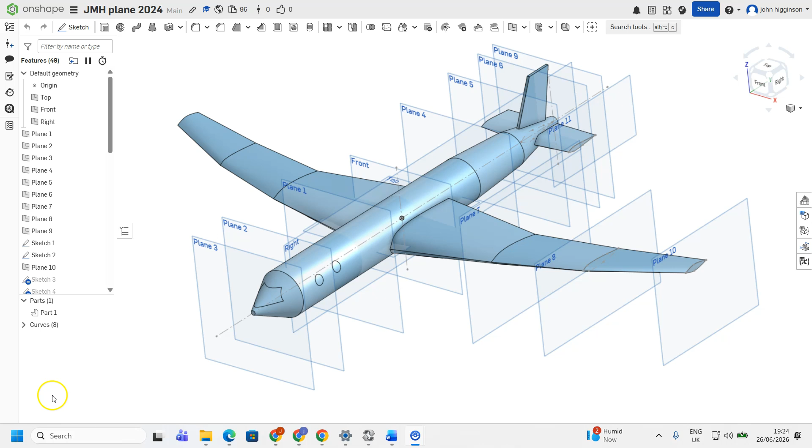Hi there. So this is an activity I use with my engineering students to introduce a range of techniques. I suppose it's the basics of surface modeling, how to use multiple planes in order to create an interesting and complex shape.

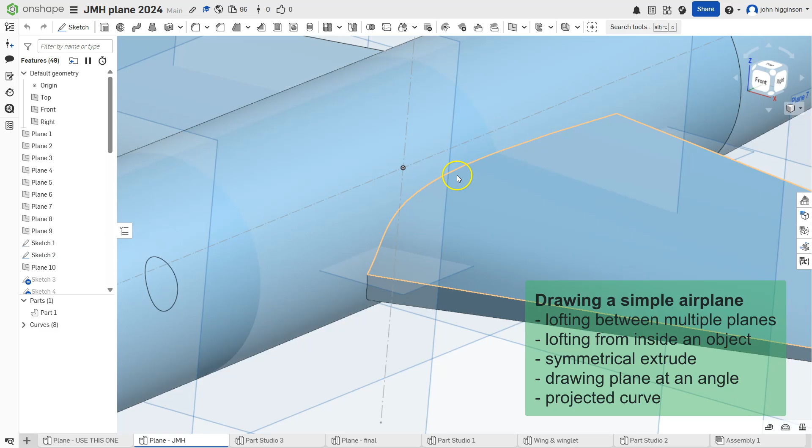Projecting from the center in order to avoid the issue of interaction with the shape and a curved surface. And then also something I've only found out recently, which is projected curve, which I was very pleased with. It means you can draw a simple shape on a plane and then project it onto a curved surface, and you can start getting some complexity.

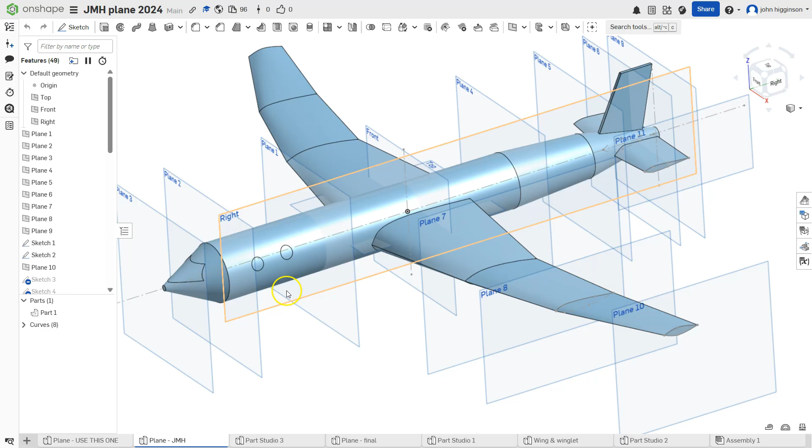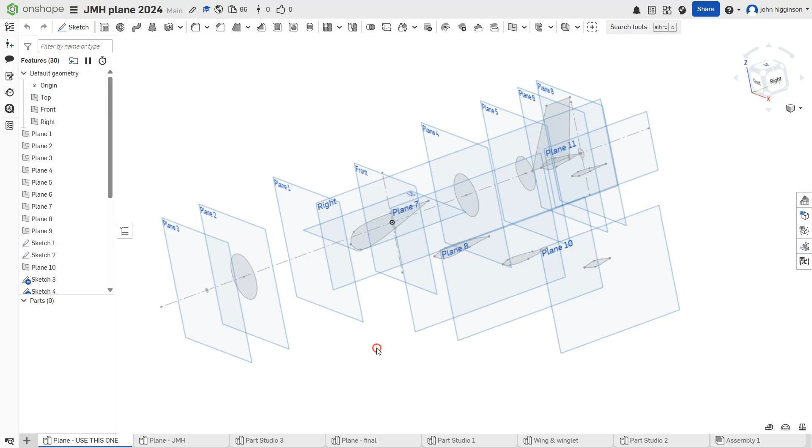So this is relatively straightforward, really, but my students quite enjoyed doing this. I'll put the link to the basic structure of this in Onshape, and I'll get round to producing a guidance sheet as well, because it's very pleasing to start off with what we have here. This is what I give to my students, like the bare bones or skeleton of what this simple plane model is made of, and then building it up. You can build it up in a relatively short space of time.

Now, how you actually construct all of this is relatively straightforward. It looks quite complicated - multiple planes and then simple shapes, just circles for the most part. For the fuselage, we've got a kind of lopsided trapezium over here for the fin. And if we look at these shapes here, let's zoom in on this one.

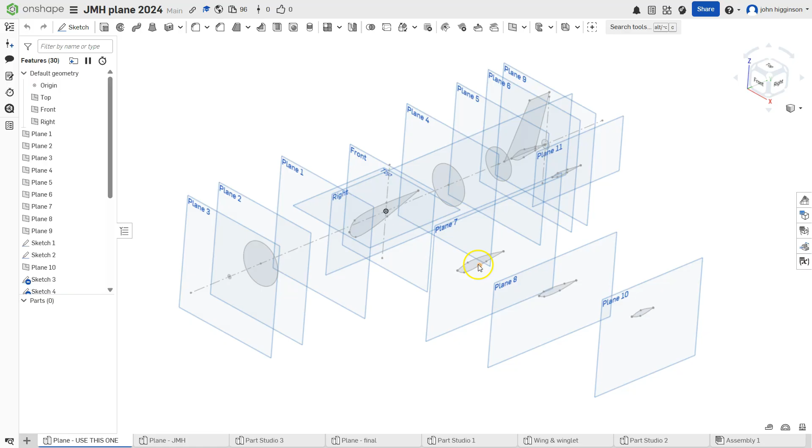Which one is this? This is sketch 9. So just zoom in on that. It's just a spline drawn and then mirrored, sketch mirror to make a closed contour, and then lofting them together.

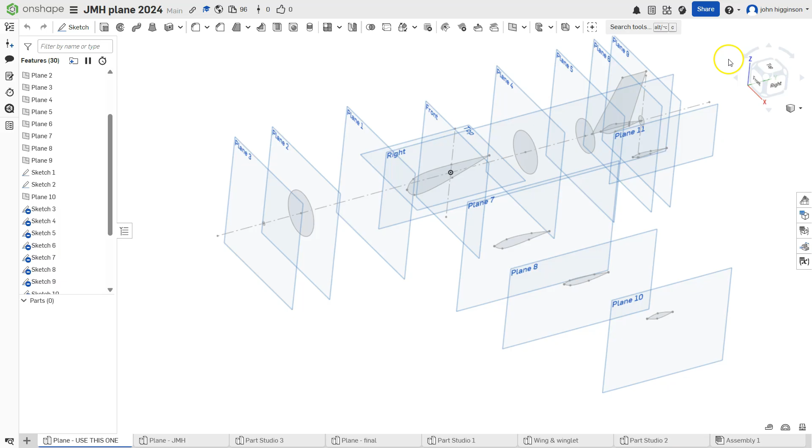So setting this up is relatively straightforward, and I won't do that in this video. What I gave to my students was all of this ready to go, and I think they can make a lot more progress. So it's a good introductory activity.

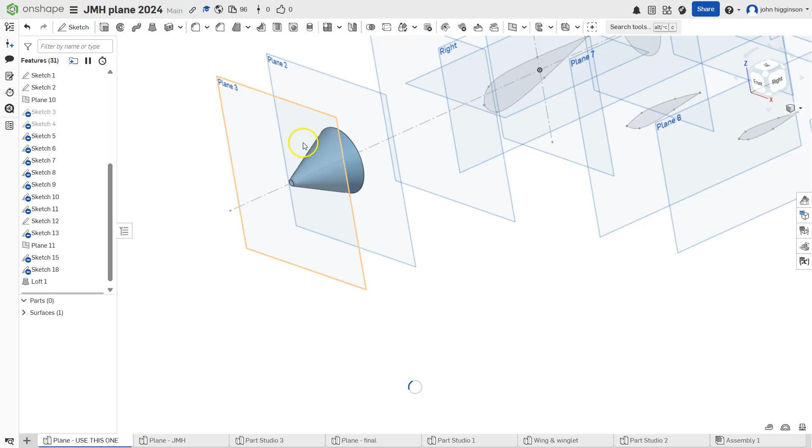So we can zoom in, and we're going to go to loft - between this shape here, so not the point, this shape and this shape. I would do that as an individual loft there. Thinking about lofting multiple shapes - did we do a solid or a surface? I think we'll do surface for now.

And then we're going to loft this shape to this shape. Oh no, that's not going to work. I think we're going to have to do solid. Let's go back and do that. Let's go back to loft. We'll make that solid. There we go.

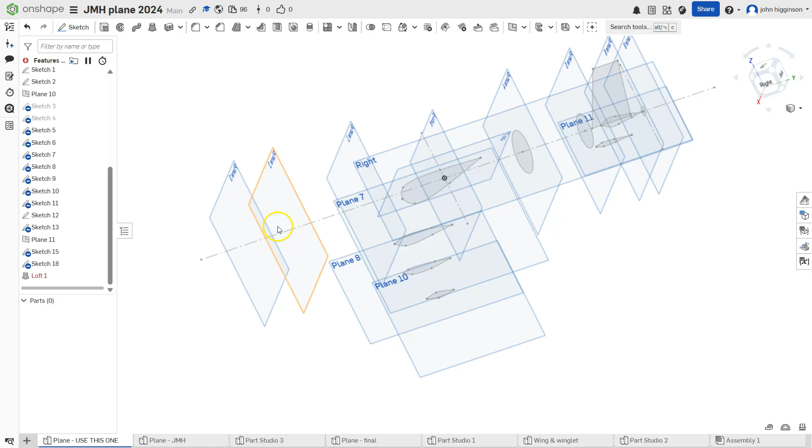Obviously, the fuselage won't be solid. Oh, there we go, marvelous. We'll do that again, so go back to loft - this shape to this shape, and that's solid.

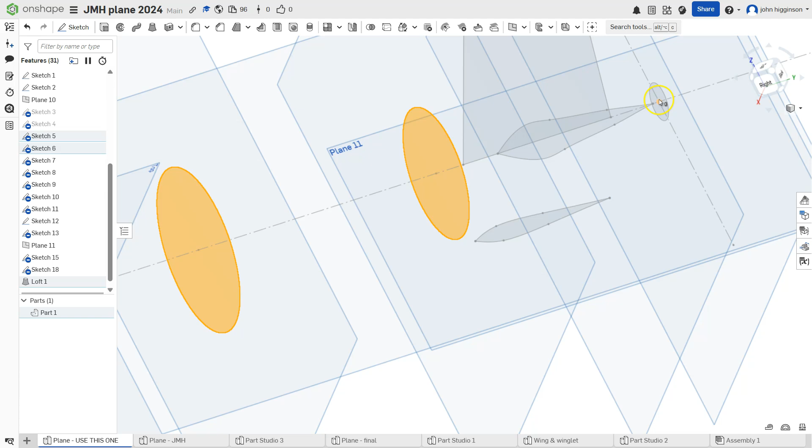There we go, good. So what you could do, when you're lofting, is loft multiple shapes together, and we'll see what this looks like. We go right to the end here and loft all of that, hopefully. There we go, that doesn't look too bad - it's a little bit bulgy.

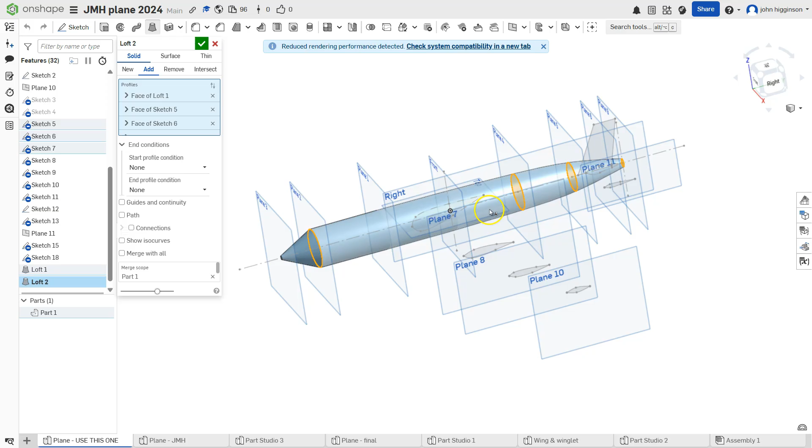If we have multiple shapes lofted together, the software tries to keep the curve as smooth as possible. Now, if we included the nose cone here, this all kind of bulges out and looks a little bit odd. I think it's quite useful to do individual lofts in this case, and it straightens it out. Most fuselages of planes are actually quite boring - they're quite straight.

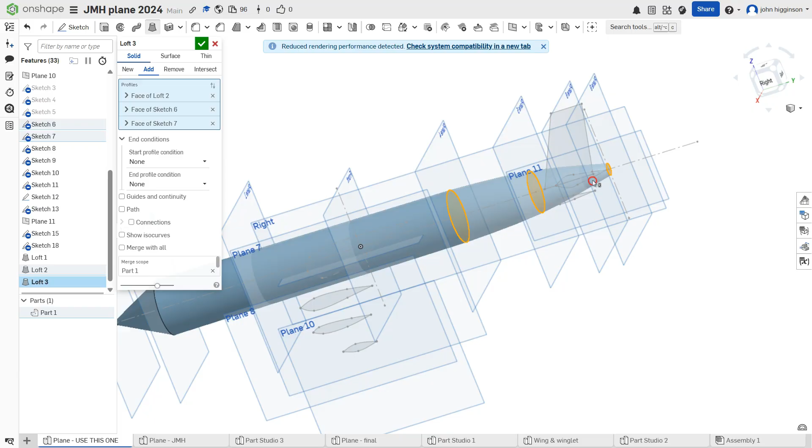So we can do a loft from here to here, and we could probably do all three of those together, and that looks about right. Good, so we've got the fuselage, the main body of the plane. That's all good. Okay, so how do we do the wings?

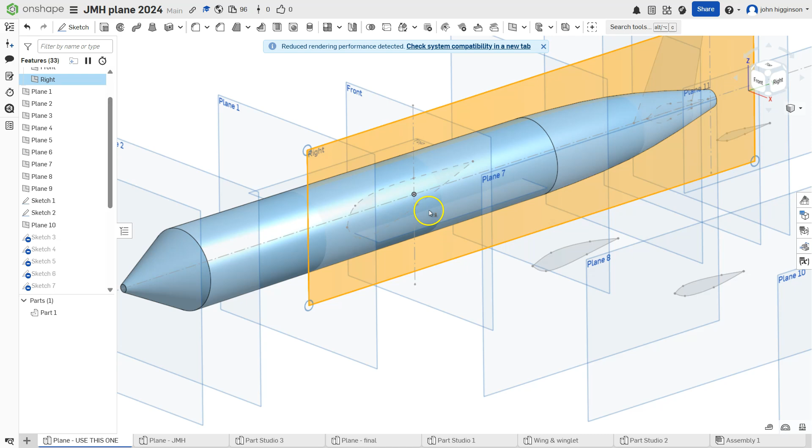The wings - if you're trying to draw a shape onto a curved surface, there are ways to do that, but actually an easier way is to just draw the shape inside, in this case on the right plane. So we're just going to draw - well, I've done this previously, I drew a spline and then mirrored it and then rotated it slightly using transform, so it's a bit more interesting.

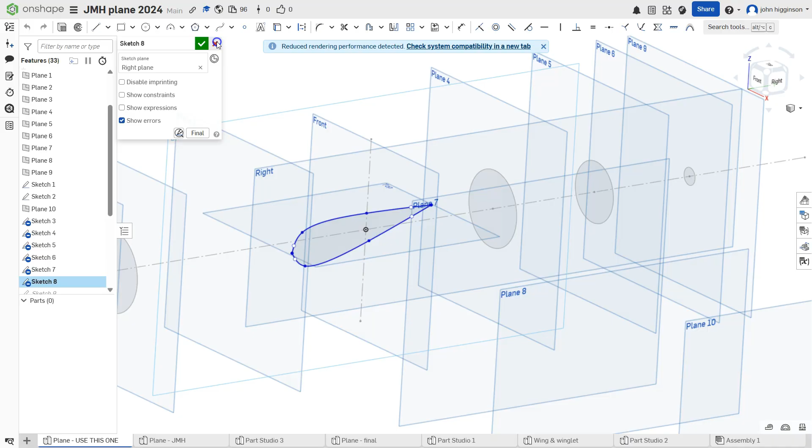But if that shape's inside and we loft from there, we have to locate where it is. So that is sketch 8 by the look of it. If I loft from sketch 8, it's quite useful rather than trying to select the shapes with the cursor - it's really useful to use the menu over here. If you just identify which sketch it is, sketch 8, we can select it, and we don't need to worry about trying to pick it all with the cursor.

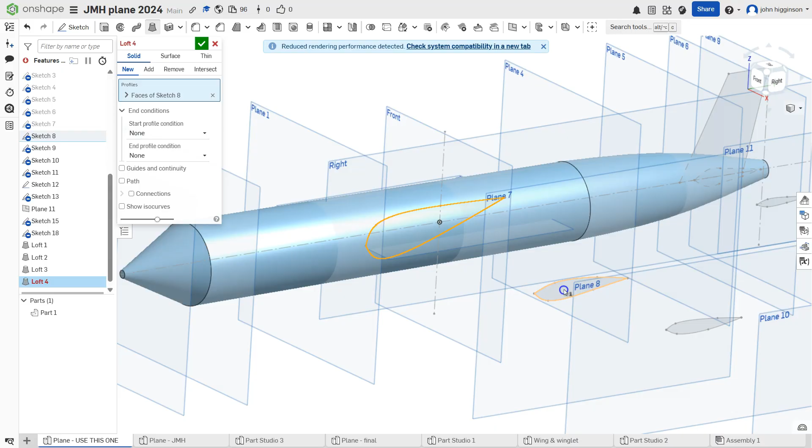And then we can see these clearly, so we can select this one to this one to this one. But, oops, it may be that you want that shape there. I think that looks a bit like a banana - I don't think airplane wings are quite like that. So I think it's useful here to do separate lofts.

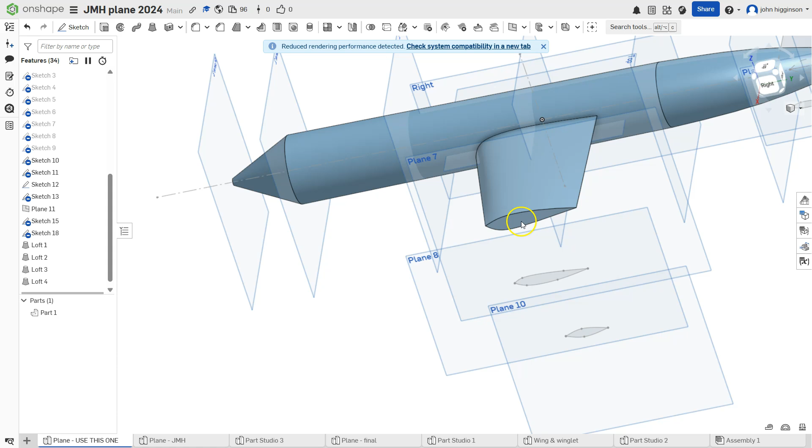So here to here, and loft that. You get these more dramatic, rapid changes rather than curves. I think that looks a bit more realistic for a wing, and we could continue if we wanted to. So we can accept that sketch.

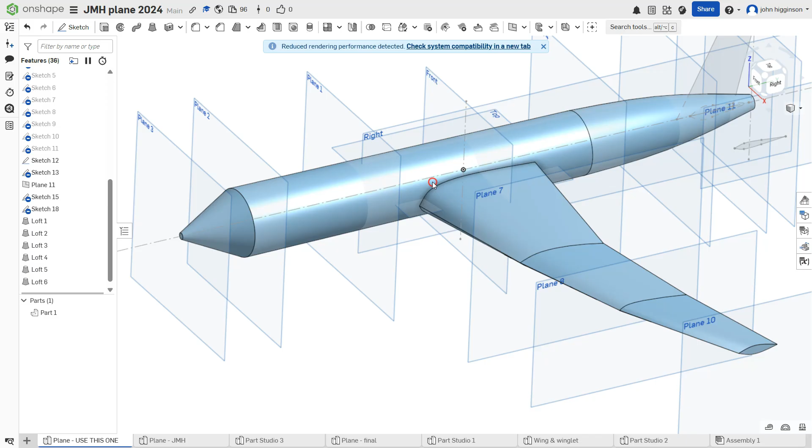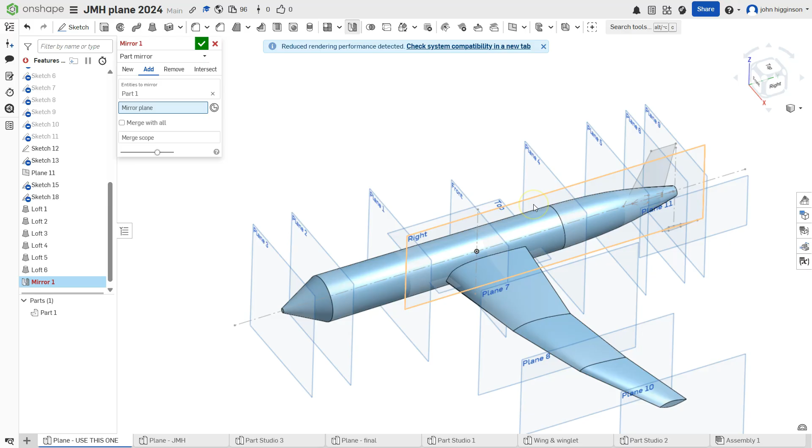As always, if we have a symmetrical situation, rather than redraw the whole thing, we can just go to part mirror. Rather than add, I'll go to new, then the entities, we can just select that entire thing. The mirror plane is going to be the central, in this case the right drawing plane, and that mirrors it, and that looks rather pleasing there. So we can accept that, that's good.

So over here I've drawn this slightly lopsided trapezium, just using lines on the appropriate plane. That's quite straightforward to do. So we can select that, and we're going to do an extrude. You could do thicken, but if we're doing extrude, we go symmetric, so about the midpoint.

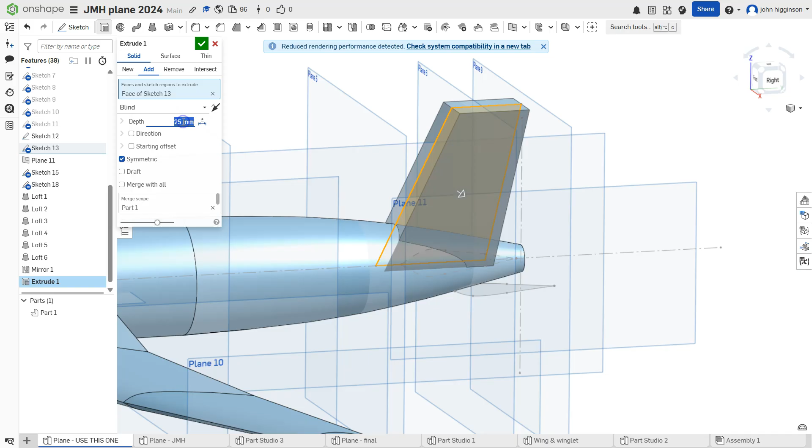I don't know what I did here, maybe 5 mils was it? Looks like a little bit skinny, maybe 15. Yeah, maybe 5 was right. Yeah, 5 looks about right.

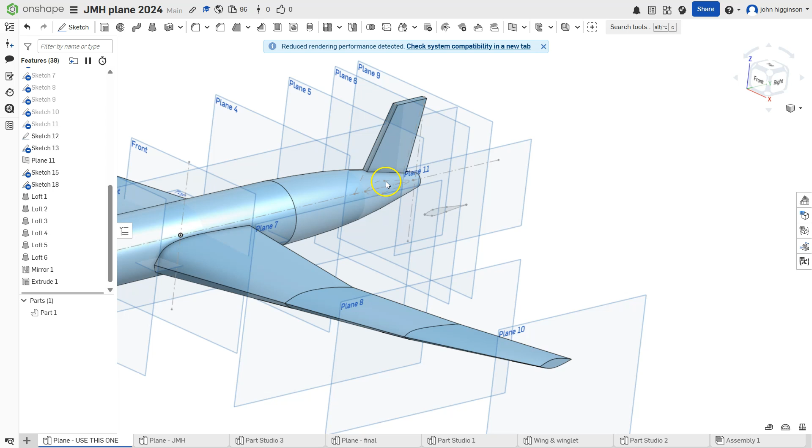Good. And again, we could go to add. New would create a separate part, so add looks quite good. So we get our tail fin there, which is quite nice. And then these kind of side sections here.

Again, I've drawn, if we find this one here, this is sketch 15. Let's click on N to look at that. So what I did was I drew a spline, and I just mirrored that about this central point.

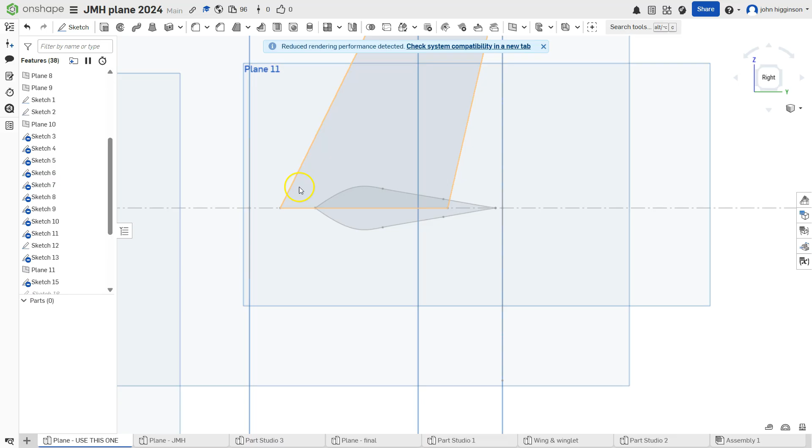There we go. So again, we're going to do a loft. Rather than try and select that, if we just figure out where it was, what was it? There we go, sketch 15. We're going to do add, I think. Let's go to sketch 15 again.

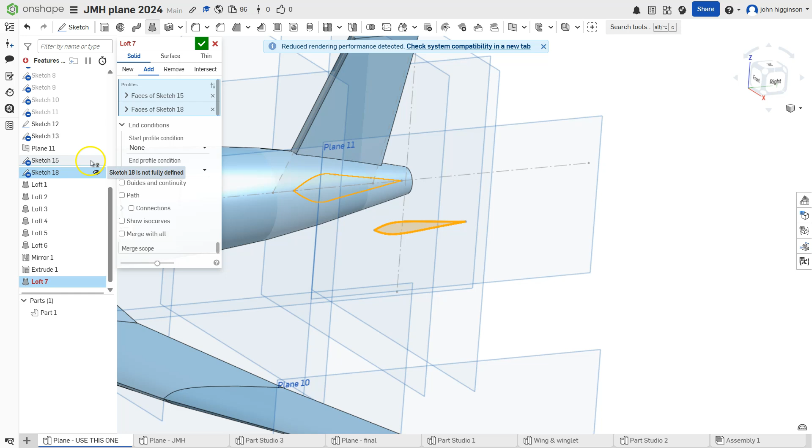Loft. Why does it not like that? To sketch 18? Oh, there we go, there we go. Yeah, it was a bit slow then, I was getting worried.

Okay, good. Once again, because we have the shape on the inside of the fuselage, the body of the plane, then we don't have to worry about all this complex curvature here. It will just sort all of that out for us. So this is quite a nice way to do things.

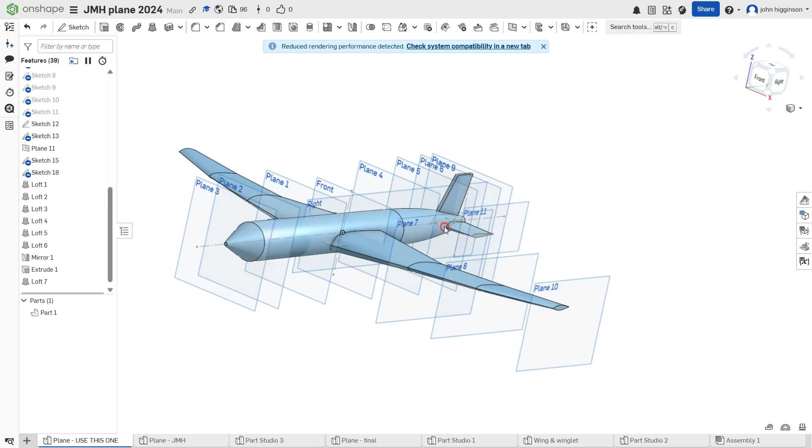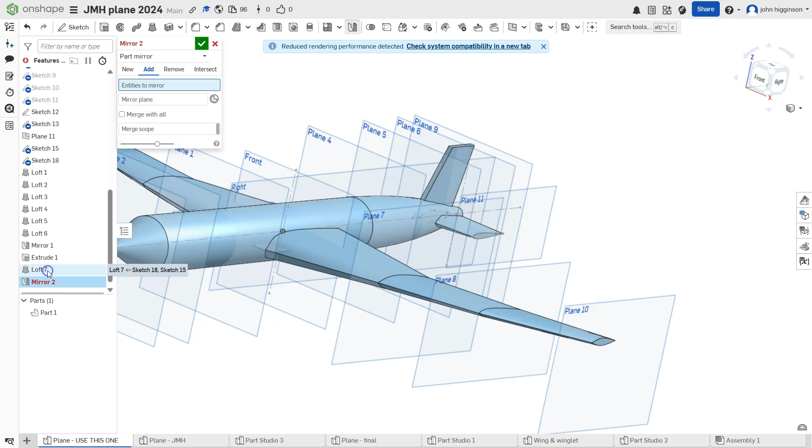Okay, so again, we could do the part mirror, go up to the top here. Part mirror is going to be add again, so the entity should be, oh dear, maybe, right, in this case, actually, yeah, we do want, that's interesting. Sure, we can do loft. Oh no, it doesn't like this. Yeah, interesting. Okay, yeah, I just hadn't noticed that issue from previously.

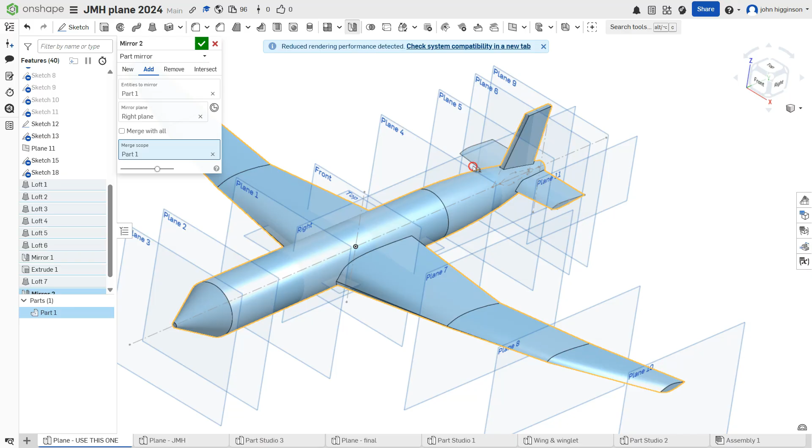So part mirror, because we added this section to the whole thing, when we go to add this, the entities to mirror, I can't select this part on its own. It's the entire plane, which is not ideal, but it does actually work. And we should get that sectional there, and it has added it. So we should have one part. Always useful to check how many parts you've got, and also the colors will change as well.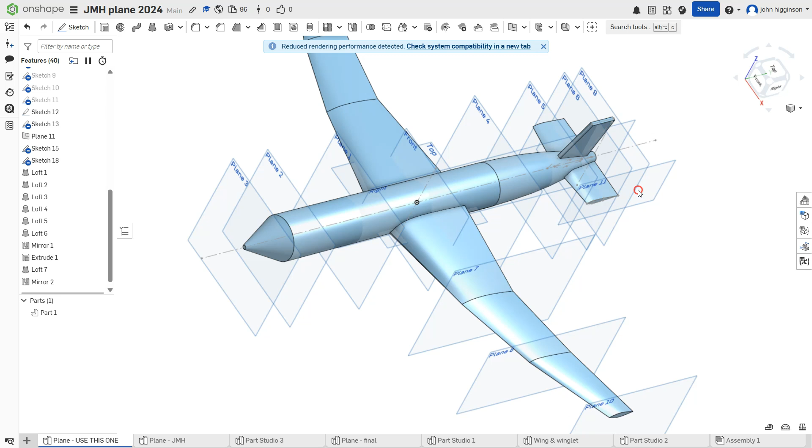So what we've got, fairly, I mean, clearly this plane will not fly. I don't think this is aerodynamically viable, but it looks like a plane. And from the point of view of the students who've never drawn anything this complex, they really enjoy this. It's a lovely little activity.

So what we could do is add a winglet. We'll see, we're on 9 minutes. I think we can keep going. So this involves various things.

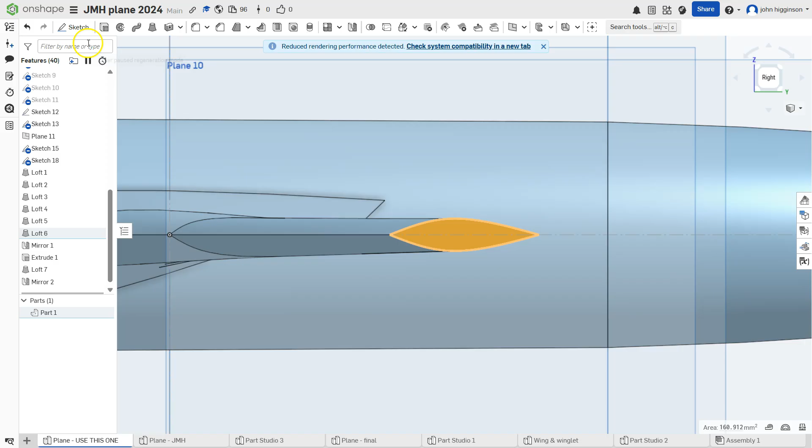I can go over here, click on the end of the wingtip, and I'm going to sketch on here. I'm going to draw a line. I'm going to make that a construction line from here to here. So we have a line there.

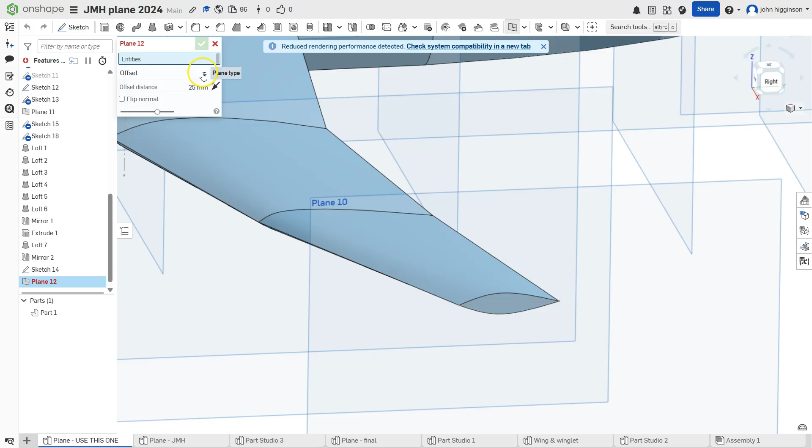I can accept that. And now we're going to draw a plane rather than just offset. We can add it, accept that. I think that works, very good. I'm going to draw a plane. Where's my planes? Add a plane. And if you go to the drop-down menu, there's lots of different ways you can draw a plane. Line angle is pretty good. So we can select that line.

And if I do, I think we've got 45 degrees.

Let's see what that looks like. That's going the wrong way. We can just pull it round. Here we go, pull that round to 100 degrees. Is that about right? Maybe a bit more. 105 degrees, okay, so this is really useful.

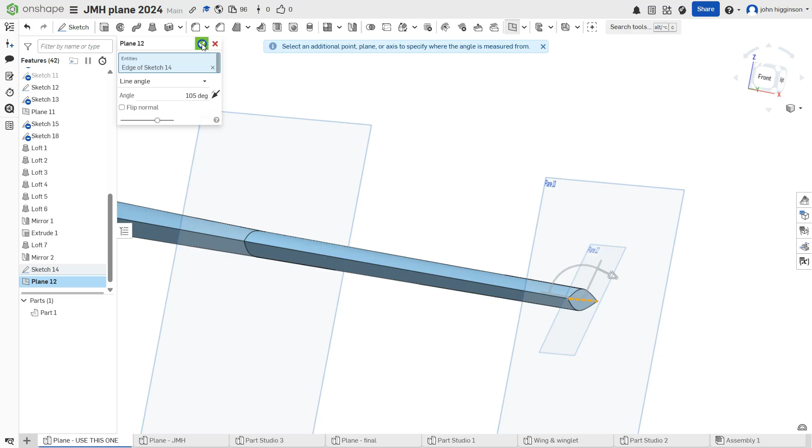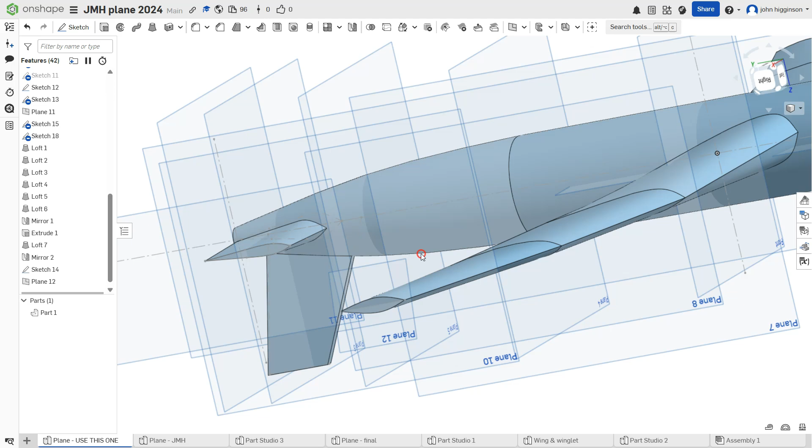So we can create a plane anywhere really, but now I've created a plane which is at an angle to the wingtip, and I can select that and click on N. Oh crikey, I don't know what view that is, I don't know where I've gone now. Let's try and find out where we are. Here we go, we're upside down. Goodness me, there we go. I think that's right, will that click that? Oh dear, yes, sometimes N works really well and sometimes it doesn't. Hopefully, there we go, marvellous.

So this is my new drawing plane, which can be a bit confusing because this is not the vertical plane. This is at a bit of an angle. But I can draw on here, so we'll do a sketch on here.

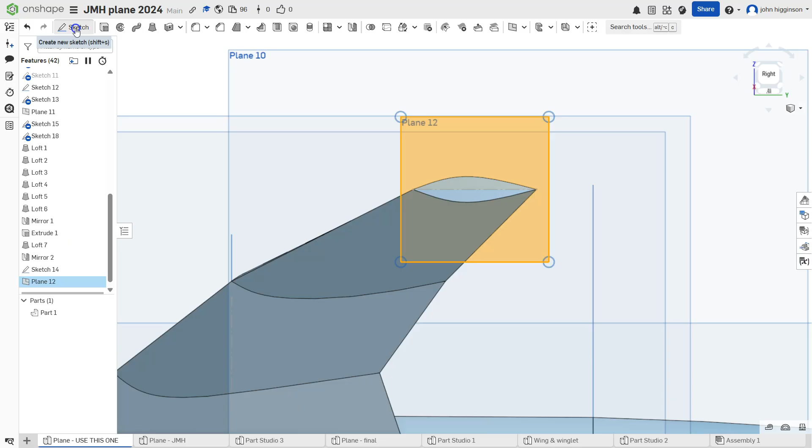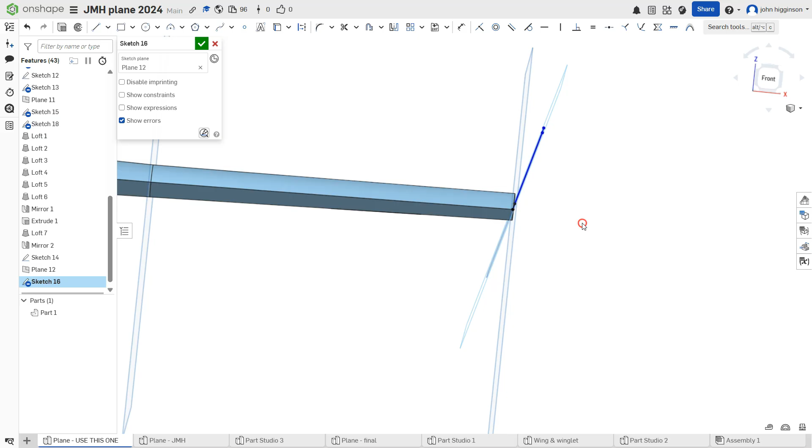We'll draw a line from here to here. What's the shape we're going to do? I don't know, something like this, a bit of a trapezium again. Okay, that's a closed contour, press escape to get out of that line drawing tool. And we've drawn a lovely trapezium at this angle, whatever that was, 105 degrees.

So we can accept that, and then I can go to extrude, click on my new shape. Symmetric is quite good, goodness me. Probably go to add again. That's way too thick, maybe 2 mils. Does that work? That's quite nice. There we go, so if we accept that, we can see that, there we go.

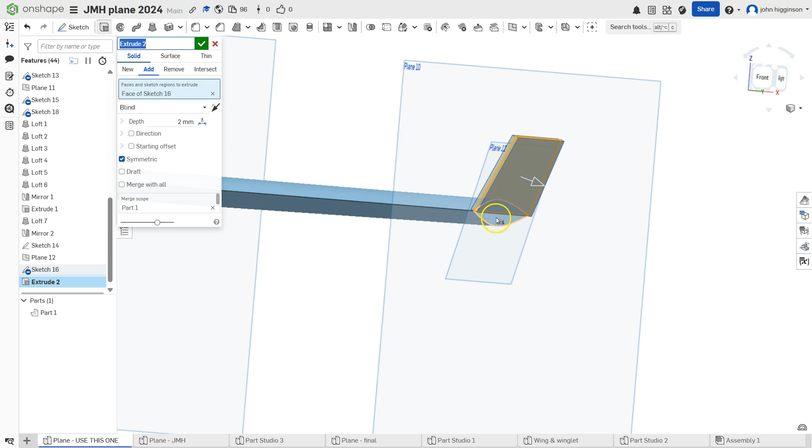And clearly it's not very smooth, we could tidy that up. But what we've added here is a lovely winglet, I believe the term's called, which looks a lot like a plane. And we could change the angle possibly and make it a bit smoother, and we could add a fillet as well to make the edges smooth.

So that's all very pleasing. Just one final thing before we finish: how you add complex features like windows and the pilots and the cockpit window.

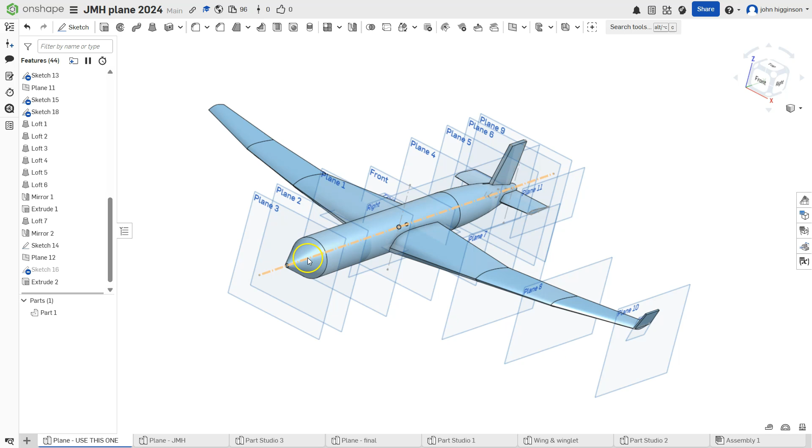So what we'll do is, let's see, we will create a plane. We could probably do it on plane 2. So I'm going to select plane 2 and click on N.

And I'm just going to draw a trapezium on plane 2. So let's draw, we should probably do a midpoint line. That'd be better, midpoint line from here to here. Midpoint line is really useful, I've recently discovered that. So rather than drawing a line and then having to center it and worrying about where the middle is, you can just draw a midpoint line directly.

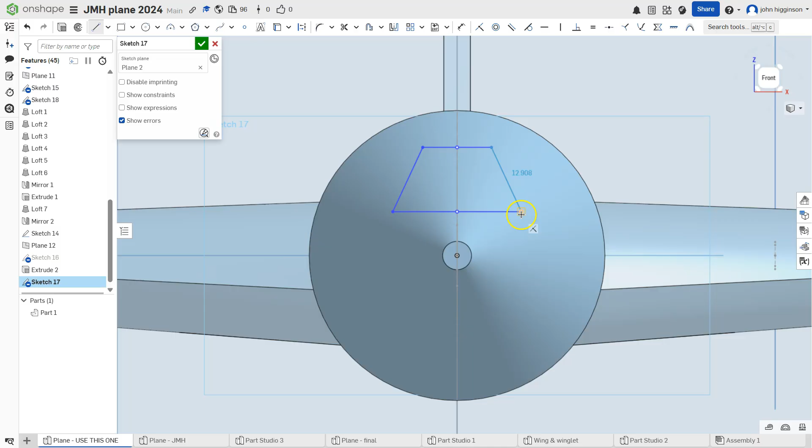And let's do one up here, that's quite nice. And then we can go back to normal line and connect here to here and here to here. So that should be symmetrical, hopefully. And we'll accept that. Okay, so I've drawn this trapezium shape, not where I want it to be, but on this 2-dimensional plane on plane 2.

Right, so go to Search Tools, you'll go to Projected Curve. Well, that's not spelled like that. Oh crikey, Projected Curve, marvellous. Projected Curve, curve to face is what we want. So the edges, hopefully we'll have to do all of those, 1, 2, 3, 4. The direction is the plane in which it's in.

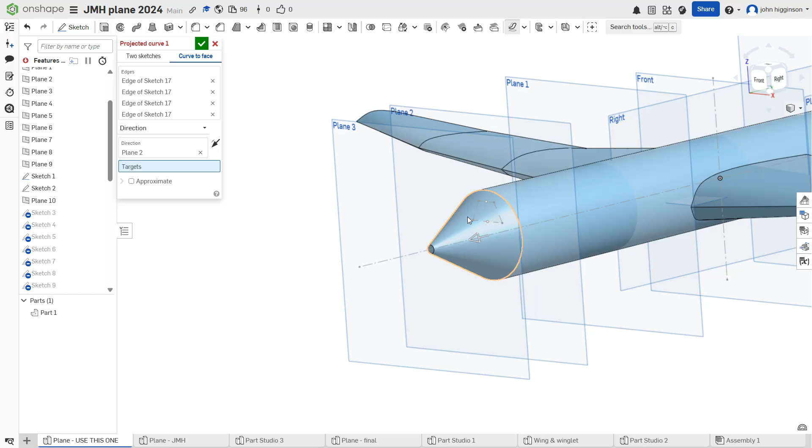Hopefully. Oh goodness me, it's not behaving itself. No, it's not behaving itself. Let's try again. Oh yeah, direction, plane 2. And the target is the thing we want to throw it onto. So this is very pleasing indeed.

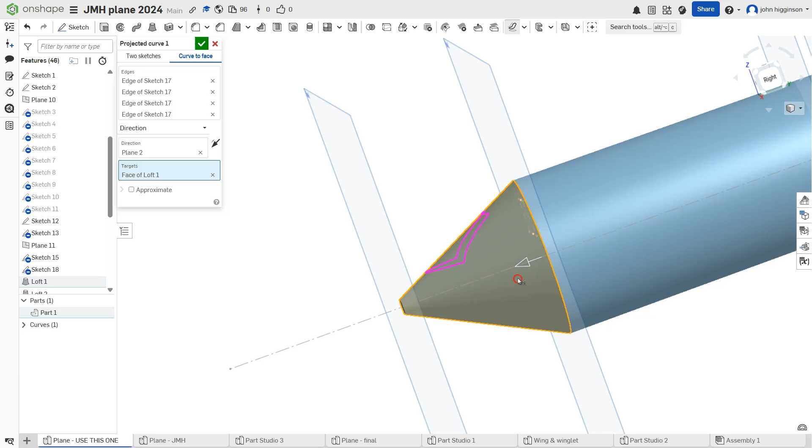So I've taken that 2-dimensional trapezium and basically thrown it or projected it onto a curved surface. So I've got now my, that isn't quite what I wanted. Oh, that's interesting, yeah, it's not quite what I wanted, but okay, it looks, oh no, I think it is. Yeah, it looks pretty good. Let's see, let's accept that. There we go, yeah, you can play around with the position and the size of that.

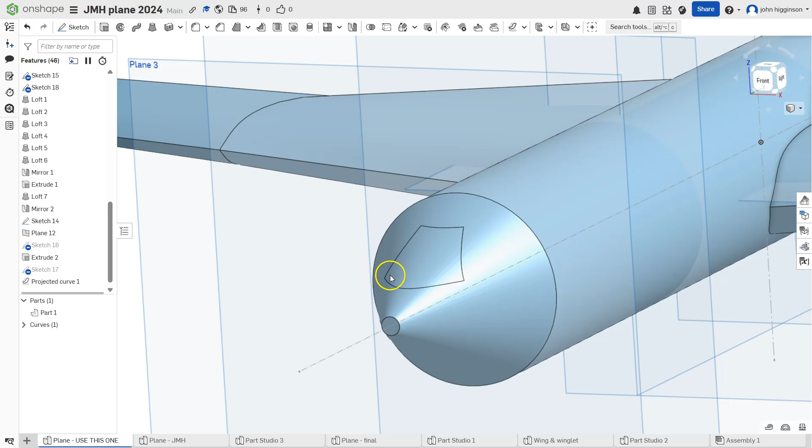Not sure how convincing that is, but this is a really useful technique to get, and then I could start doing things with this, maybe extruding it or removing a certain section and making it look a bit more realistic. So you could obviously do that on the right plane. You could put a circle for the windows and then do a linear sketch pattern all the way down. And you start getting something which begins to look convincingly, hopefully, like a plane.